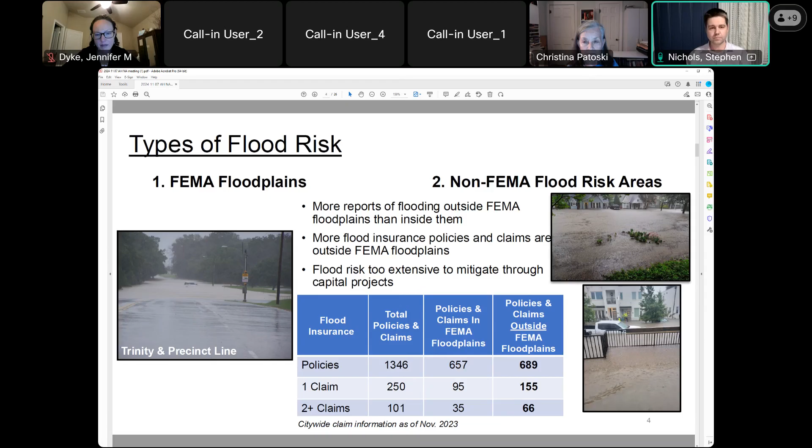This is an example of a FEMA floodplain—a creek with a road crossing. This is actually an image captured by one of our high water warning system cameras earlier this year.

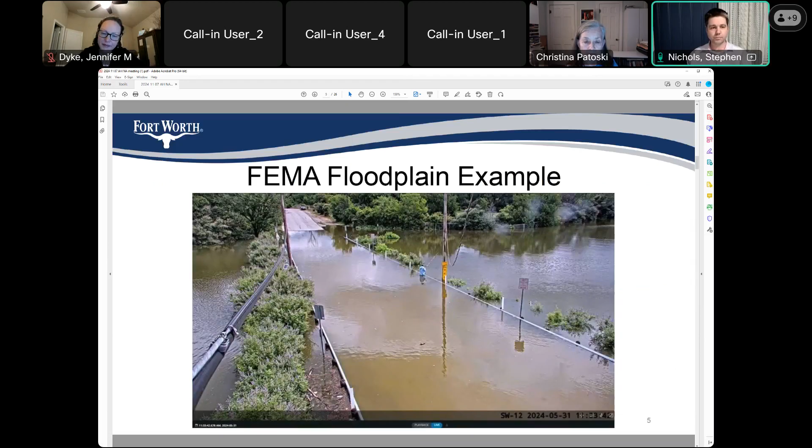In these two photos, at the top left, we've got Magnolia Avenue after a significant storm, and at the bottom right, that's looking across the street towards Central Market. The Western Arlington Heights area actually drains towards this same location outside Central Market.

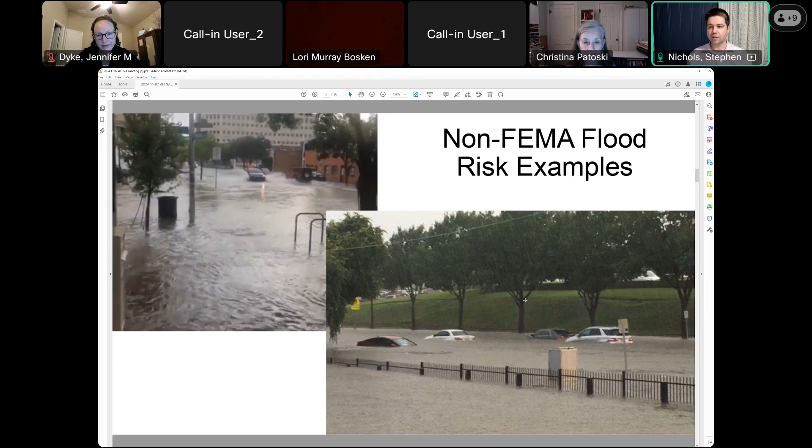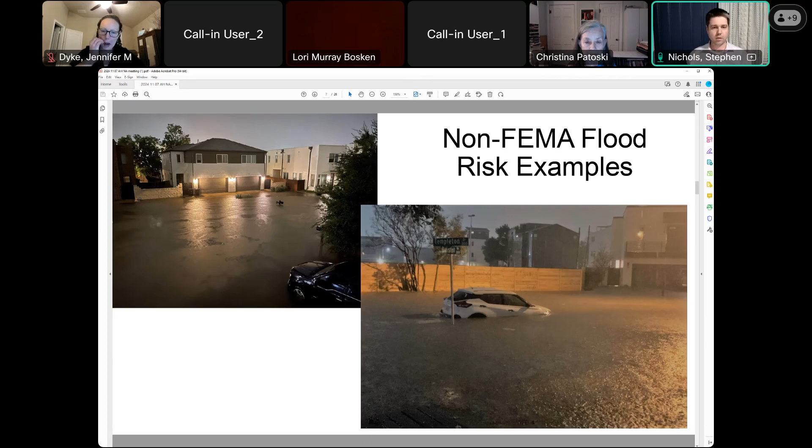A couple more photos of what a non-FEMA flood risk might look like. These two photos are taken in the West 7th area. You'll see that the streets are flooded—this car has 2 to 3 feet of water covering it. So all these flood risk areas were not FEMA, but they look like floodplains.

Across the city, we've got different types of floodplain mapping now. Should I pause for questions? Were there any questions about that first part?

Stephen, I was wondering—you said that the water over by El Campo, Pentecost, and Pershing flows from there over to Central Market? Yeah, it flows under the freeway and then down towards Hulen Street. Ultimately it discharges to the Trinity on the other side of the Union Pacific Railroad yard.

That's not close. So we've got two types of flood risk mapping. We've got nearly 50 square miles of FEMA floodplains across the city. We also have our area of potential high water, or potential high water areas—that's an advisory type of mapping, a low level of detail. It tends to be fairly accurate though in older parts of the city, parts developed before FEMA floodplains.

So the parts of the city developed in the 1920s and 30s, like the Arlington Heights area—we have our city flood risk areas, which is our newer regulatory flood risk area. We have 3.5 square miles across the city, mostly within urban areas inside Loop 820, parts of the city that developed in the 20s, 30s, and then 1940s.

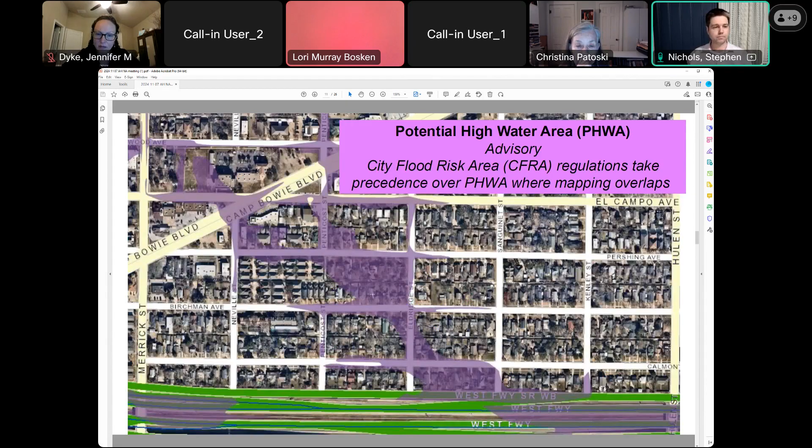So we want to be able to communicate these non-FEMA flood risks to folks like you and the rest of the community, so we can share this information at open houses or public meetings like tonight. For about 2 years now, the city flood risk area mapping has been available through the flood risk viewer on the city's website. And earlier this year, we added the potential high water area, which is that advisory information citywide.

Prior to the regulations that were effective in July of this year, we really only reviewed for detailed impacts and drainage developments of 1 acre or greater. But with this new regulation since July 2024, we would now have some review of development less than 1 acre that's located in those city flood risk areas. That's the orange shading that you saw earlier.

Part of that regulation means that there may need to be an engineer involved to help evaluate your project, whether that be elevating the structure or making sure we're not pushing floodwaters to someone else. And that may need a certificate of compliance.

So what does this mean for property owners like yourselves? First of all, we want to make sure that property owners and the community are informed about flood risk. This means you can make more informed decisions about your property. One of those decisions might include getting flood insurance. Flood insurance typically applies to FEMA floodplains, but if you know you're already at risk of flooding, you may be interested in flood insurance, which is available across the entire city, not just inside FEMA floodplains.

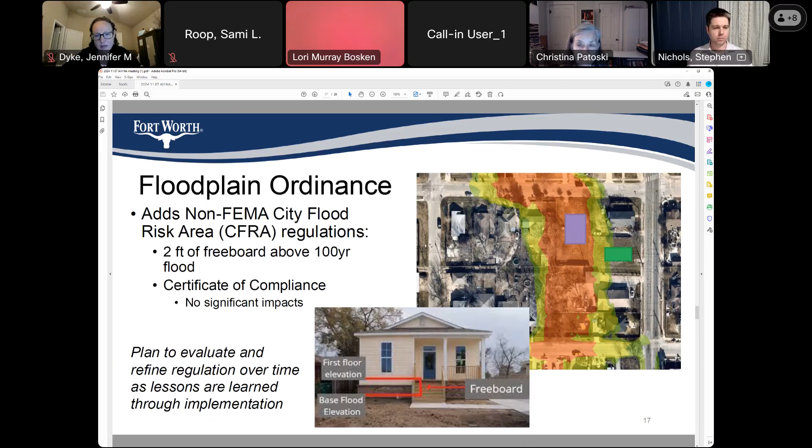So I wanted to look at a couple of different examples of city flood risk areas and development within those areas. I understand that within the West Arlington Heights area, there was a zoning case at the corner of Pentecost and El Campo. And that work was located in a city flood risk area.

Of this image here, I've pulled an image from the engineering report that was used to create the city flood risk information. So what I wanted to highlight here was the location of the property, outlined in red. The majority of the property is in this very light green color, which tells us that in a 100-year storm, a fairly infrequent event, there's only 1 to 3 inches of flooding across that property.

So the work that was proposed on El Campo and Pentecost would have required 2 permits potentially connected to the city flood risk areas. The first was a permit for the fence. The fence that's above 7 feet requires a separate permit. And that fence permit is what actually triggered our review for city flood risk areas on this property.

The other permit would be for the concrete flat work, like the sidewalk and the driveway. But because that concrete would be at the same elevation as the existing ground, there really ought not be any impact as a result of that work.

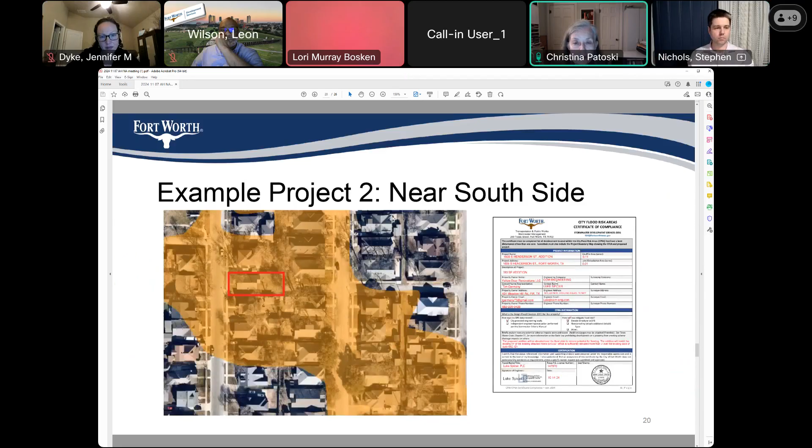Yeah, so the Accela system, which is our permitting system, is tied to GIS, as Jennifer mentioned, and it's similar to how we do floodplain as well. So that lot is flagged as having CFRA, and the workflow is generated, and it sends it to stormwater SDS team and development services. And then in order to proceed past that requires a person to actually look at it, evaluate it before that proceeds further.

Okay, anything else? So going back to the El Campo parking lot, so according to the stormwater department, what they're putting there should not negatively impact the nearby neighbors in terms of increased flooding. Is that correct? Is that the idea? So we've looked at it to determine that it meets our regulations.

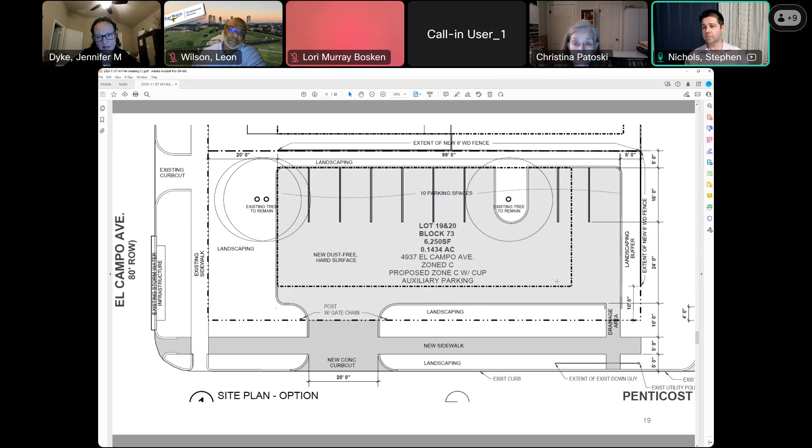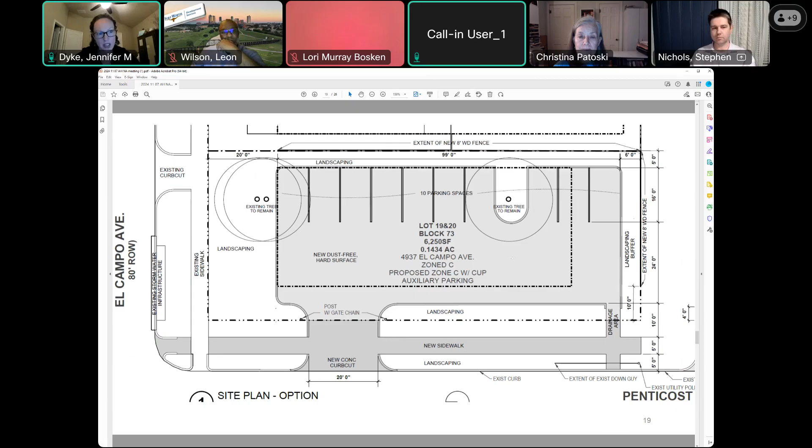So Stephen is going to talk about this next part in terms of cumulative impacts of impervious surfaces. So Stephen, why don't you talk about that, and we can talk about what we're looking at in terms of more and more impervious surfaces across the city. Got it. So that was kind of step one, was getting these current regulations in place to bring up these current properties that we know are in these evaluated flood risk areas up to our current standards. And now Stephen's going to talk about what we're looking at in terms of our current standards, because we know that there's gaps. This is a topic that we've been working on for a while now with stakeholders to try to figure out how we can better improve our regulations to keep more of our communities safe.

Our cumulative impacts initiative is what looks at that increased impervious cover across the watershed over time. This initiative, we kicked it off about 3 or 4 years ago now, but the idea is that a single project, we'll use the El Campo example, one lot with 10 parking spaces doesn't really have a measurable impact across a watershed. So down at Hulen Street, for example, we wouldn't really be able to measure or quantify the impact of those 10 parking spaces. But if that same activity was repeated many, many times across the watershed, it would have a measurable impact at Hulen Street, for example. So the idea is that one of these projects individually doesn't really cause a significant impact, but many would. We're looking at two types of cumulative impacts.

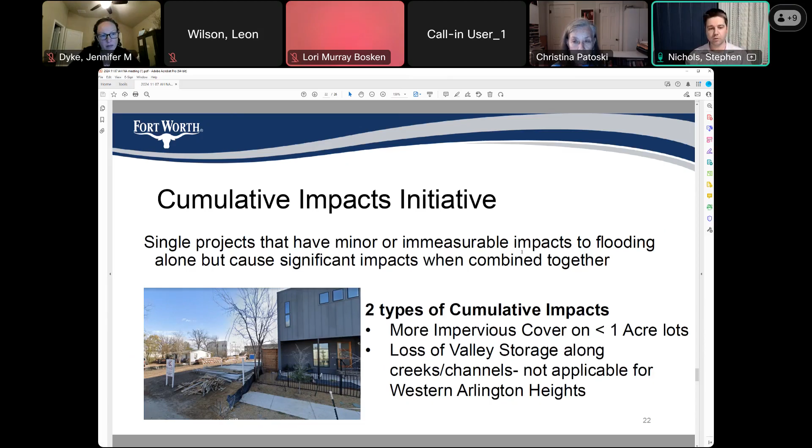So a bit of a timeline. We started looking at the cumulative impacts more closely in 2020 when we kicked off two case studies, one case study for each type of cumulative impact we want to investigate - one for impervious cover and one for the valley storage.

We've had several meetings over the last few years with the Development Advisory Committee, the Infrastructure and Transportation Committee. The team and our consultants have been doing benchmarking - how are other cities handling this? Are they handling it? And then we've also had five stakeholder meetings over the last 12 to 18 months.

So our stakeholder engagement on this has been fairly extensive in that we work with our stormwater program stakeholder group. That's made up of folks that represent the larger entities that pay into the stormwater utility. We also have a cumulative impact stakeholder group, whether it be residents who have expressed interest, engineers, or developers - people who will be touched by these potential policies. So we've got developers, engineers, and city staff on that focus group.

We'll also have smaller focus groups - I think those have been more engineering focused, trying to figure out, together as a community of engineers, how do we document that we're complying with these types of things? How do we solve these problems? We also have our stormwater liaison group, which we work with quarterly on different development concerns.

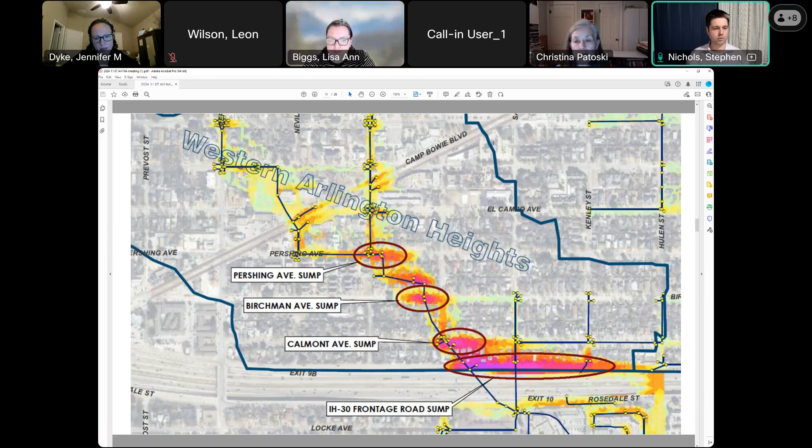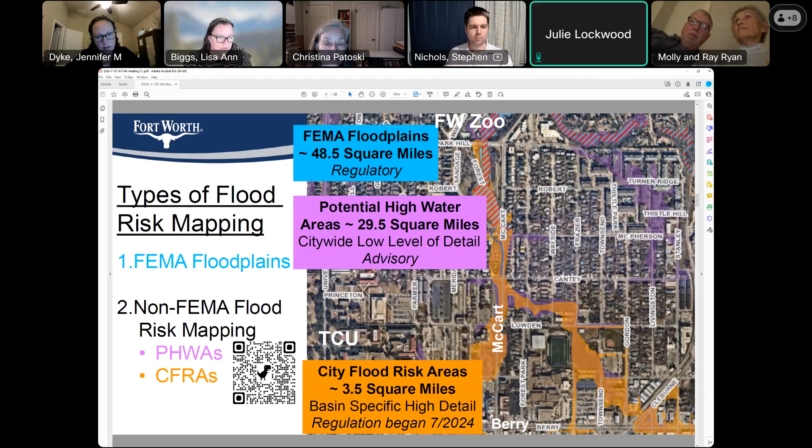I apologize, I had a follow-up question. My property that my son lives in is catty-cornered to the empty lot that's going to be developed into parking spaces, and it rolls right from that lot onto my property. I just want to know who's going to be assessing the drainage on that, because I'll get flood insurance a lot quicker if y'all are going to go out there every 4 to 6 months and check. When I pull up the GIS maps with the floodway overlay, it's going straight onto 4932 and my neighbor's property on that lot in the alley. So I don't know if there's going to be an additional drain into some kind of underground sewer or drainage system, but I just wanted to check on how quickly y'all are going to assess active water downpours that come in Texas.

Right now this project has been permitted and has been shown to be in compliance with our current regulations. So after we permit, we don't go into additional assessments, but they have given us the information to show that what they can build is in compliance with our city regulations.

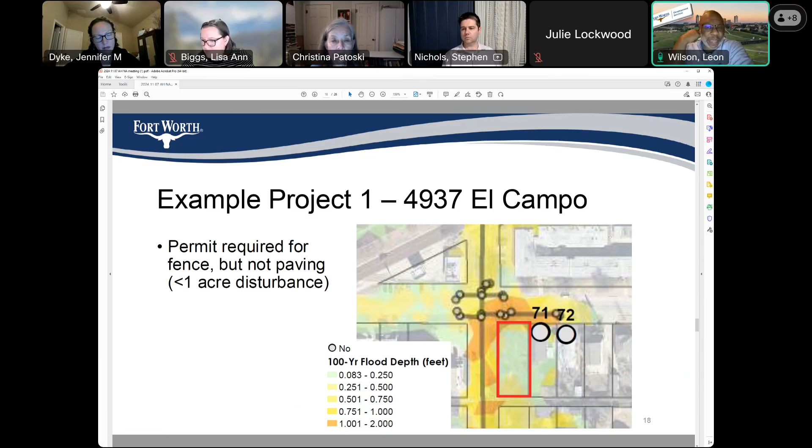That's typical of any development. That's part of when developments go in, looking at the flows to not totally change things or push the water in a different direction, but to manage and maintain those existing flow paths. So that's common for any development. With that impervious cover, it may technically get there faster, since the existing ground was grass and now it's concrete. So technically there would be more flow, but that's not covered under CFRA or our current ordinance for a site this small. That's why, as Stephen mentioned at the end of his presentation, we're looking citywide at the impact of impervious surface to see if there's things we should potentially be doing differently or regulating differently because of more and more impervious surfaces.

Jennifer? It sounds to me as if this is obviously going to increase the flow. The flow is going to be more rapid. If we've had flooding in the past, the flow is going to increase the flooding. Is that correct? Because we have more flow now, since it's impervious.

Yeah, so locally within the street or maybe the neighboring property and the alley, the increase in impervious cover would generate some additional flow. Hopefully they're actually directing it to the street. It's hard to tell from the site plan, but if this is a curb opening, then maybe they're directing it towards the street where it's better able to be handled.

But from a watershed perspective, we wouldn't expect to see increased flows, say on Hulen Street, for example.

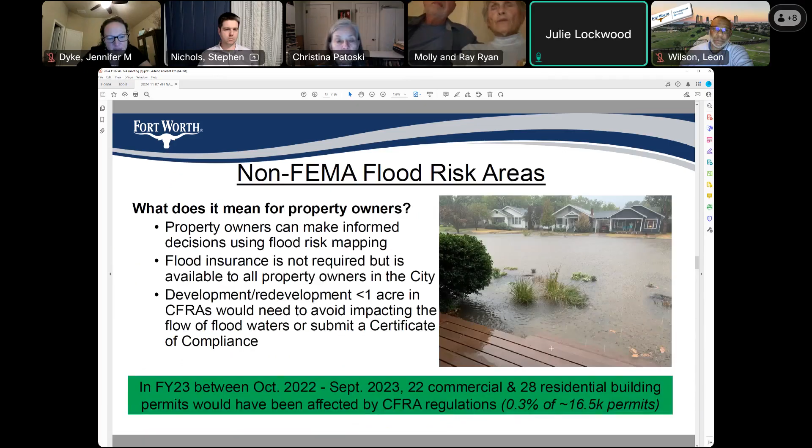North, okay, I think it's north. I'm looking at it, couldn't tell, I don't think north would be El Campo. North would be, sorry, back southeast, I'm on that corner. So the south corner edge of the parking lot will now be the corner edge of my backyard, or with the alley. Oh, I got it. So it follows that line, you see that flood line there? That's where it is, yeah.

I sell real estate in Huntsville, Alabama. My son's in Fort Worth and works at Lockheed, and we invested here because it's such a great neighborhood. But when I see somebody paying what they did for that lot just to put 10 parking spaces on it, there's bigger issues here in the city, and then I get this flood risk letter, which I don't know if this notifies FEMA, so FEMA's now going to put it in the floodway or the flood fringe.

Most parking lots, when you develop, have to have some kind of spillway or something, but I guess because this is smaller than your standard lot, it flies under the radar, so the city can't put some kind of additional provisions on it. So I need somebody to send me an email of the person I can call, the 911, that my back wall is flooded.

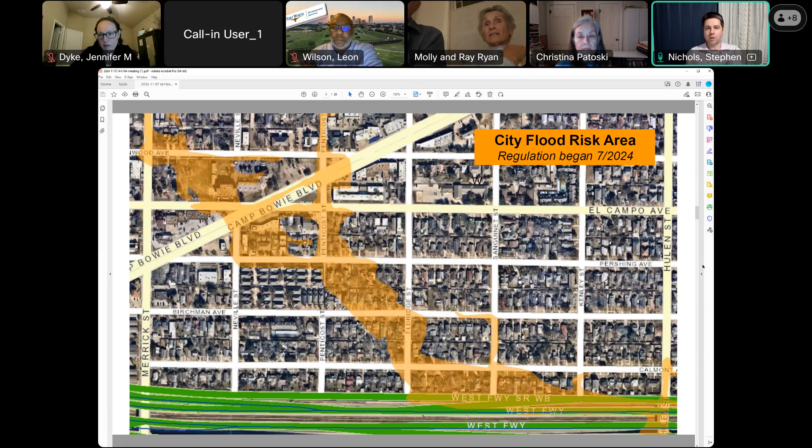So would that be the zoning change that was? Right, so the zoning change — I believe, and there's no one on this call from zoning, so I'm not the expert, but let me tell you what I think I know. I believe the site plan comes in, it gets looked at by city staff, the zoning commission, and it goes to commission, and then it ends up going to city council for discussion and approval. So the piece they're focused on is the use of the land, not the detailed drainage or that kind of stuff. I think the question they're answering is: is it okay to use this as a parking lot? So it's really the use that they're focused on.

Was this approved before July 2024 when the new ordinance went into effect, or after? Do you know? I believe it's after. I don't know about the zoning, but the fence permit came in after, and that's why it was flagged for our review.

And I have kind of a separate question that relates to this: if something is deemed to be in a FEMA floodplain, are they required to have flood insurance, or is it a choice? So if they're in the FEMA floodplain and they have homeowners insurance, that's... Lisa, what are the details of that?

They've got to have it. Yeah, if you have a structure, a business, or a home that's located in the FEMA floodplain and you have a federally backed mortgage, you're mandatorily required to have flood insurance, and it goes along with the mortgage. So it's kind of protection in case you do get flooded while you're still paying off your mortgage, to make sure that you are able to repair your home.

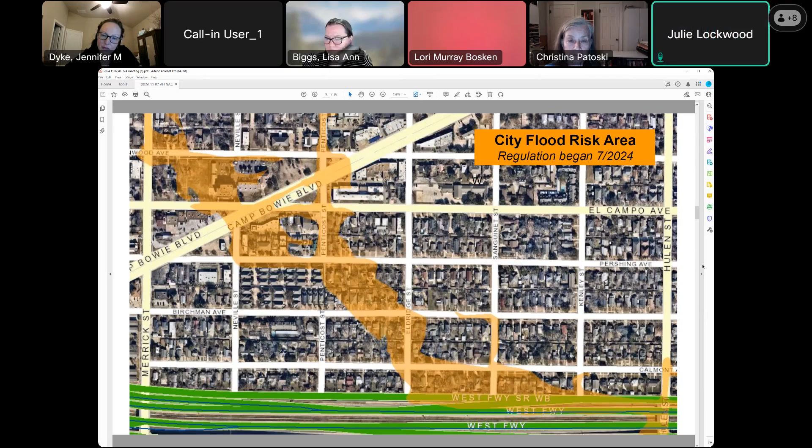And then it can go up to $2,000-$3,000 a year, so pretty high. You've got to really get that information, and that's why I'm asking y'all these questions.

To me, just because this lot is too small, it flies under the radar. If the city changes the zoning and allows it to be developed into a lot versus a house, and it sits in this yellow area, to me it should have another layer of respect or inspection regarding the waterway, because we know this area floods. I mean, since we got the house, it's flooded like 3 times on the street. It's crazy. So I don't know if that's something y'all can recommend. I know that it was vetted, but it wasn't vetted for the drainage, because I submitted a very long letter about it with photos and everything.

And it just kind of slipped through. I mean, my lot is probably worth more without the house sitting on it now, because of what this person paid for this land.

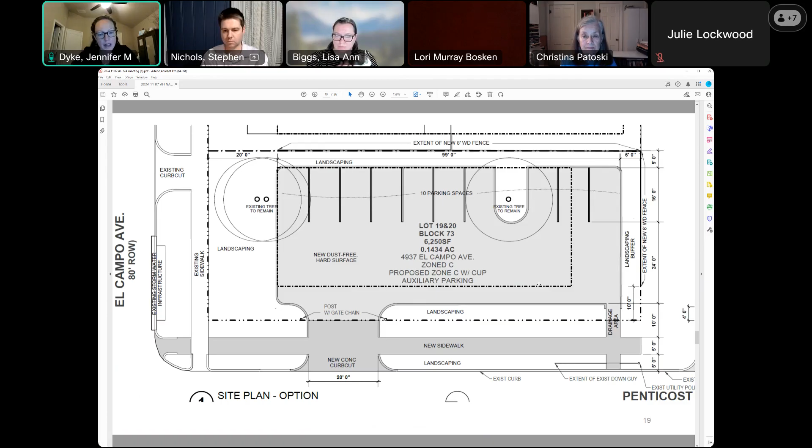I met with the homeowner that lives right behind this, right across the alley. He protested this for sure, but he did say he's pleased with what he's been able to see. They're bringing in this big gray stone, so it's not going to all be asphalt. It's going to be stone to have water penetrating around those trees and possibly in that landscaping area too. So it's maybe the best of the worlds that we're going to have for any development, be it a home or this lot, which is relatively small parking space.

I'm not happy, I'd like a green lot where my dog can go. But anyway, it sounds like the company is trying to do the best possible environmentally.

I've been told too that they're looking at using permeable pavers. I just don't have any of the details behind that. There's a lot of white rock in the lot now that you're going to use. I was by there just this afternoon driving home, and they are grading. They're actually spreading the rock, and then they're putting a porous type of substance over it - I understood it's not really concrete - so it actually drains better. That's why the rock is going underneath it, from what I was told.

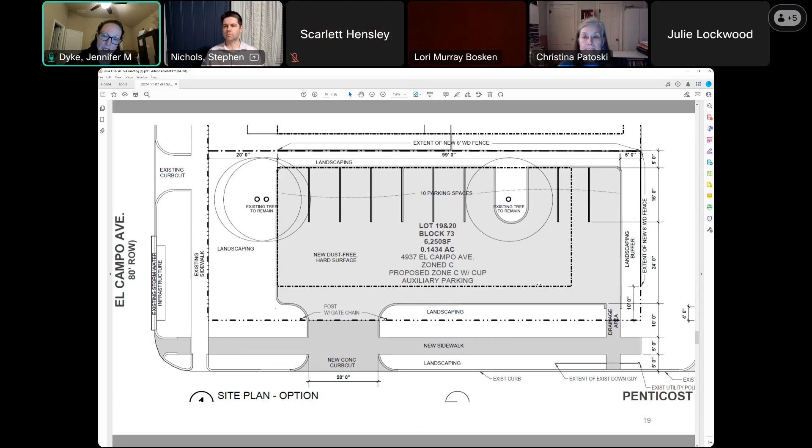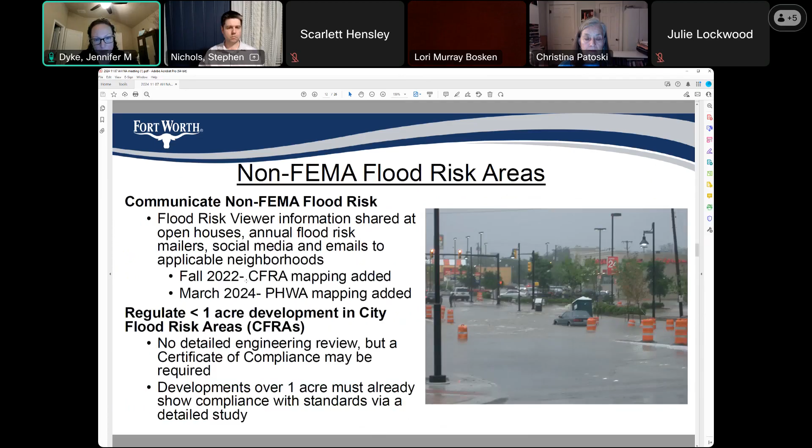I think it would help, Stephen, to go back to that slide that showed the potential high water. So in this western Arlington Heights area, there is no FEMA floodplain. FEMA typically maps a floodplain along major creeks and channels. So in y'all's area, the flood risk that's been mapped is local flood risk by the city of Fort Worth. Go back to the orange since that's the more detailed flood risk mapping.

At this point, I would say we don't expect this to change unless the city is able to go out and do a project to significantly mitigate this, which is very challenging to do. That's not on our list right now, and that's why we're trying to make sure we're able to communicate and regulate as best as possible, because this city flood risk goes across much of central Fort Worth. So it just makes it challenging to tackle.

We're trying to tackle it over time, but it's going to take a really long time. That's what we want to do: make sure we're regulating, communicating, warning, and also doing mitigation, as well as maintaining the drainage system out in this area.

So what we do is scheduled checks of our inlets to make sure they're clean, and our storm drain pipes. If y'all ever have concerns or see an inlet not draining or clogged, please call us, because we'll come out and check that, look at it, open it up, or TV the lines. If y'all ever have concerns that something's wrong with the storm drain system, we'll want to come out there and inspect that.

That's another thing we do, making sure we know the drainage systems in these older parts of town that were developed a long time ago. They're not up to today's standards. So we want to make sure we're maintaining them to the best of our abilities, so they're able to function at least how they were designed.

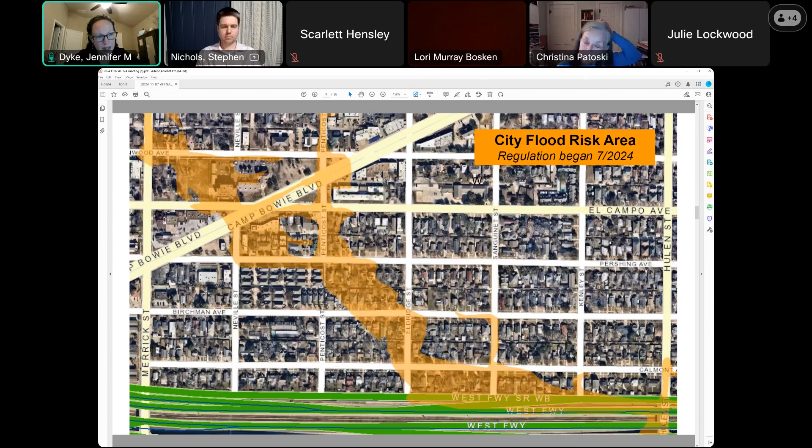A long time ago, when the area was developed, people didn't realize the intensity of development we'd have today. So when the storm drain systems were put in with that development, they were just built to a smaller size than we would today.

We've got this similar situation all across older areas of Fort Worth, and it's not just a Fort Worth problem. It's cities that have been around for a long time. This is a nationwide issue. Over the last 7 years or so, we did a lot of benchmarking and work with other communities to see what they were doing. We were informed by a lot of nationwide studies, because it wasn't just Fort Worth trying to figure out how to tackle this, but cities across the nation with the same problem.

Okay, well, I know it's 7:15, so we appreciate everybody sticking around. I think the discussion was really good.